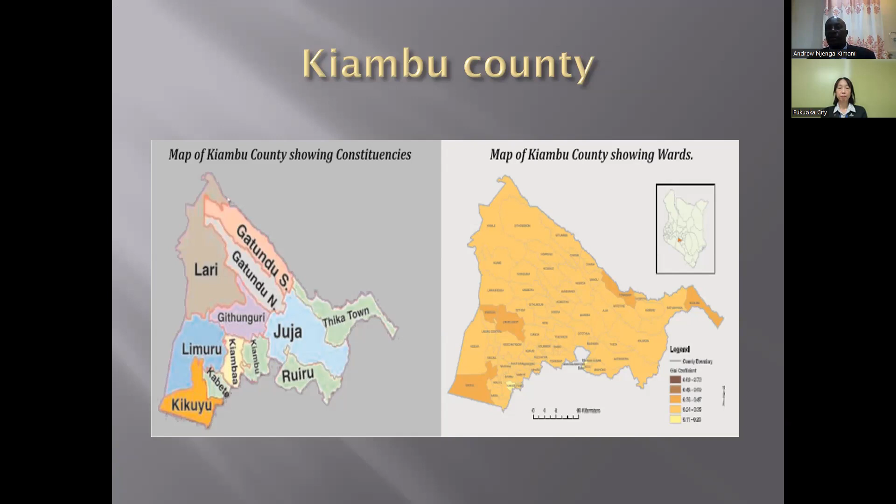So Kenya has a population of 50.9 million people according to the 2019 national census. We have 1 national government and 47 county governments. Kenya has rich tourist attractions. You can travel to national parks. The 7th wonder is in Kenya. And we have diverse ethnic communities, 44 existing together. Kiswahili and English are the national and official languages.

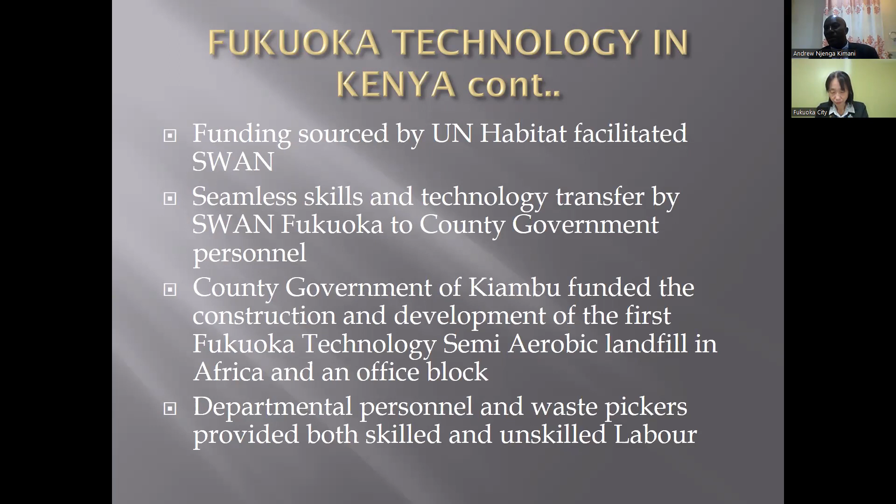So the first semi-aerobic landfill based on Fukuoka technology was completed in a record one year in 2016. With the synergies brought by this, Kiambu became a local and regional benchmarking destination for other counties and African countries. Kiambu had the privilege of having a side event at the first TICAD in Africa.

That is TICAD 6. Plans for development of supportive infrastructure for the Fukuoka semi-aerobic landfill were in place using the $350,000 disbursed by the UN as part of the funding, for the weighbridge and a 50-ton daily material recovery facility. This is the money that remained after paying the consultants, which was supposed to put up supportive infrastructure so that the operation of this facility could proceed.

But this did not happen as planned, as it was an election year with a change of government. We had a new election in 2017, placing a new administration that was a departure from the first administration, and that did very little to support this important technology to take off.

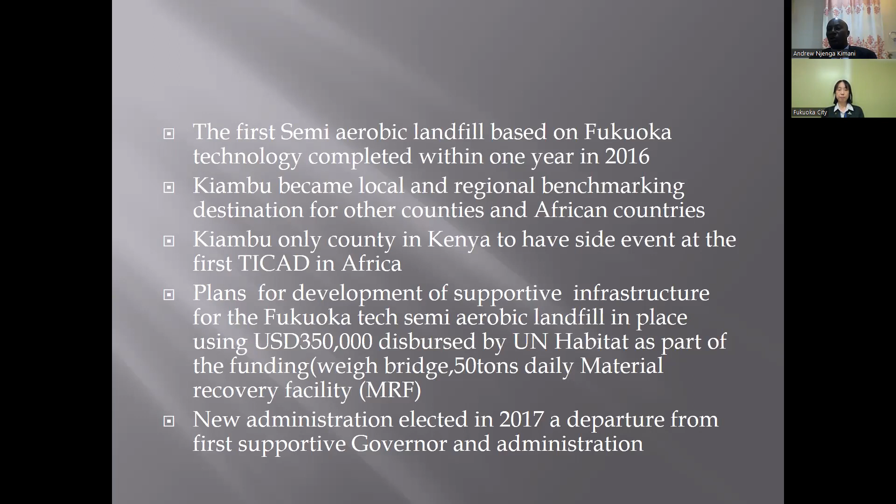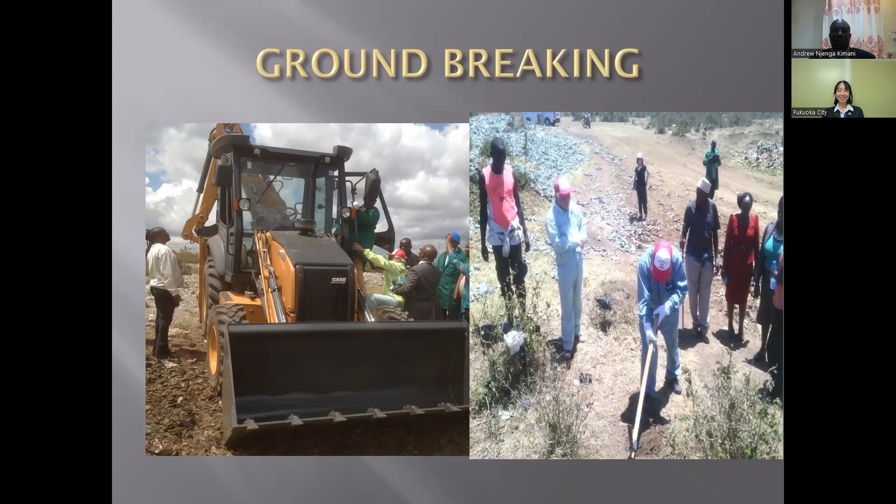So the groundbreaking, we have the governor, we have Professor Matsufuji from Solid Waste Advisory Network, advisors, and then African Region UN Habitat Director present, and other Kiambu County and Kenya national officials. So we can see Professor Matsufuji literally breaking the ground. Next slide. Yeah, so these pictures show the groundbreaking day, which was a great event for having brought this appropriate and good technology to Africa. Next.

And after the groundbreaking, the construction took on, and the Kiambu County officers in the Department of Environment and the waste pickers at the dump site were engaged in the construction. So this was hands-on transfer of technology. It has never happened again in this country. This was the first engineered landfill, and even the next one that is being funded by the World Bank, the tender was floated, and a company given the rights to construct, which is a big gap because the officers in that county, which is next here called Murang'a, have no idea what it is.

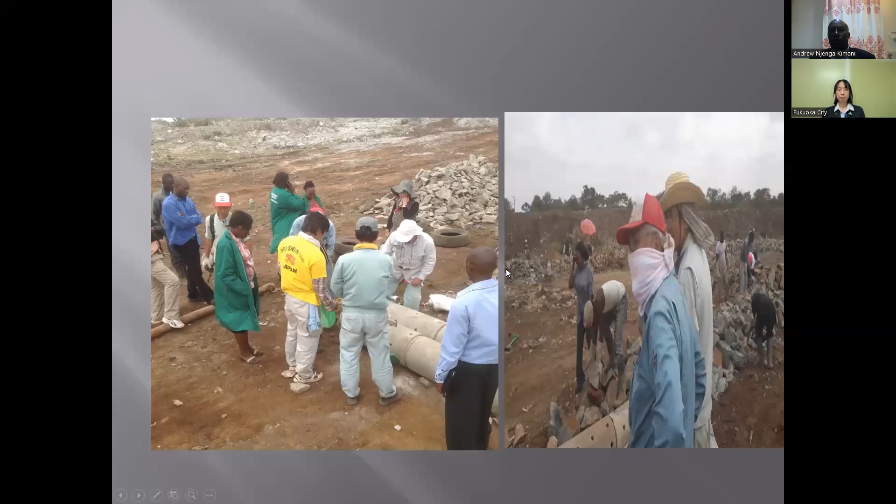So Kiambu has the first officers to have hands-on training in engineered landfill construction and management, which is a great idea and approach by the Fukuoka group. So yeah, next.

So these are the leachate collection pipes, which were sourced locally. We opted for the concrete pipes, which were perforated 2/3. It was a challenge initially, but eventually locally we are able to do the perforations. And you can see the cobblestones as referred to in Japan. In Africa, we refer to them as hardcore, locally sourced, which are covered 50 centimeters to allow ventilation and also seepage of leachate. Next, please.

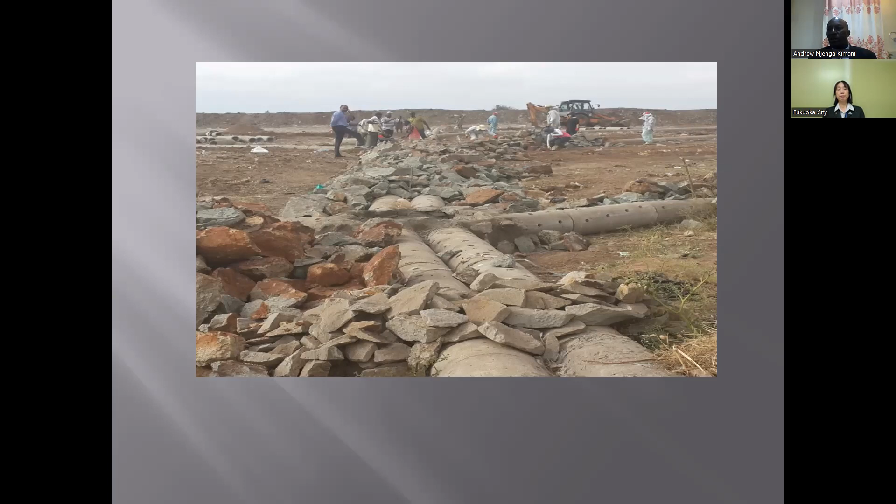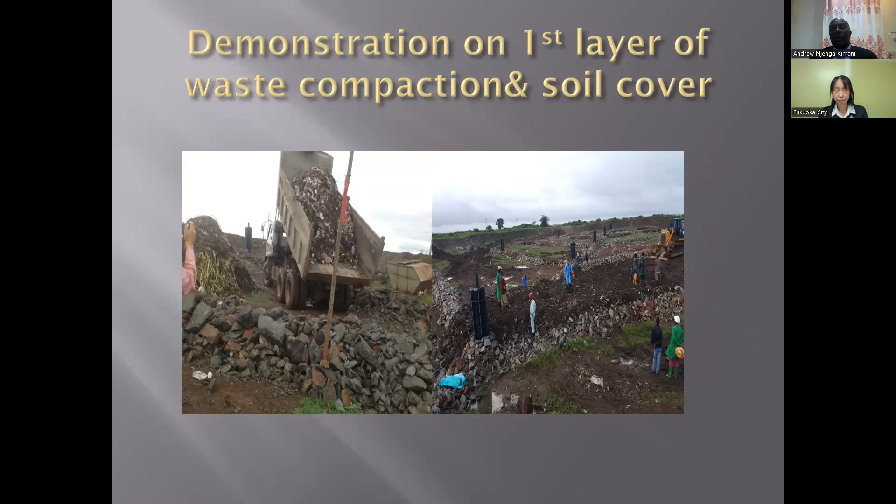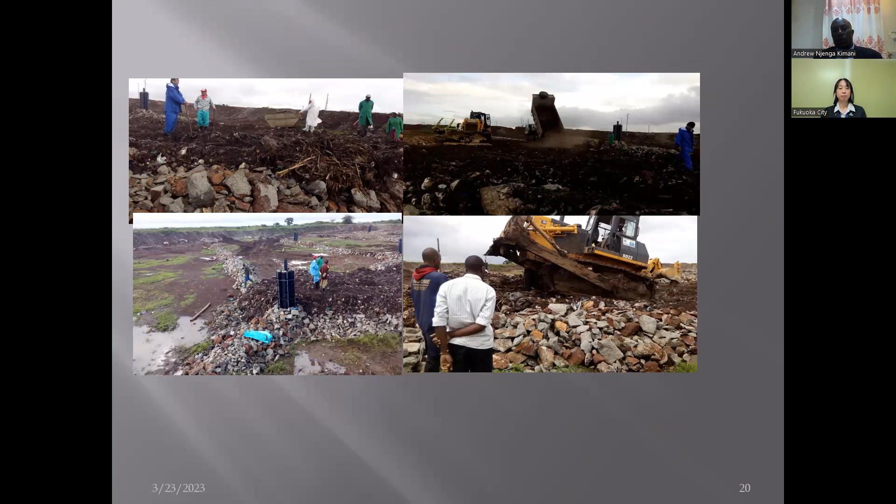So in 1 year, we were able to do the landfill. You will see from the background, and even demonstrate on the tipping and compaction and cover of soil. And we did this with around 50 trucks. And we were able also to see that the leachate started forming, and we were able to monitor the progress. Next. So these are the demonstrations. You can see the vertical vents and where the waste has been put. Compaction, we were using the bulldozer. That's what we had that time only. So next.

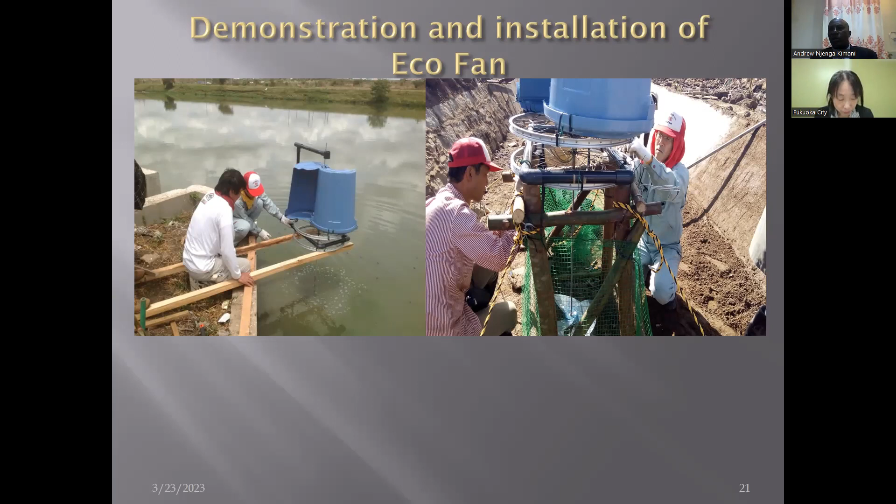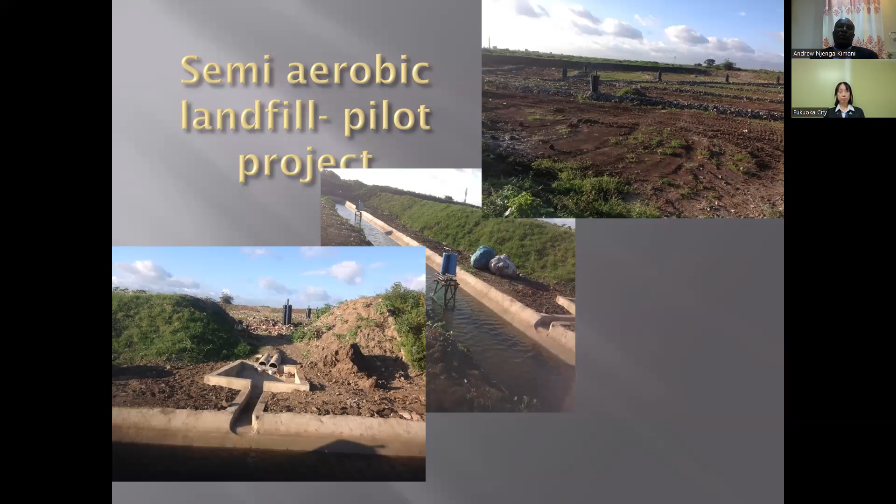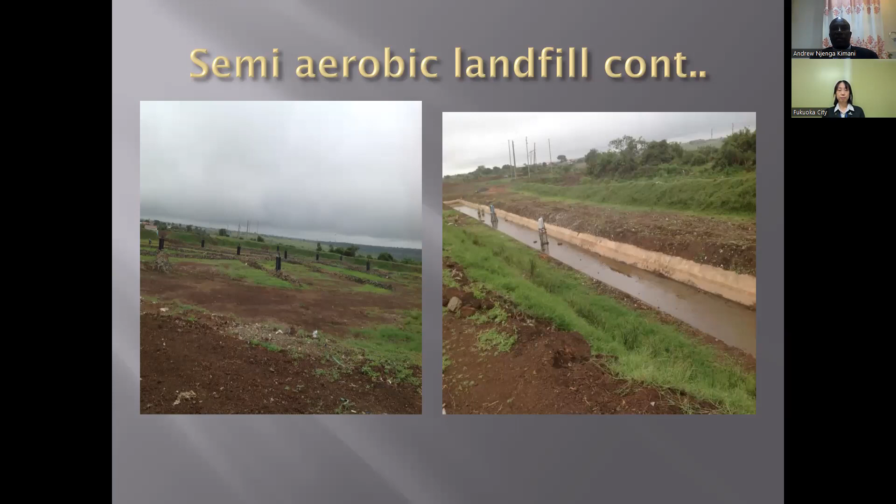So within 1 year, we were able to have the leachate, and you can see the landfill and the leachate that came from the demonstrated compaction and the waste that was compacted in the landfill. So that is between 2015 to 2017. So the next slide. Yeah, see, so this is basically the landfill. We had around 21 cells and all vertically ventilated. And this is the leachate control point with the eco fan and the biotope, also for the treatment of the leachate. Yeah, next.

The Fukuoka method also came with composting. As you noted, the larger fraction of our waste, 60%, is organic, and it is also a resource. So we had a composting facility also using the Fukuoka method.

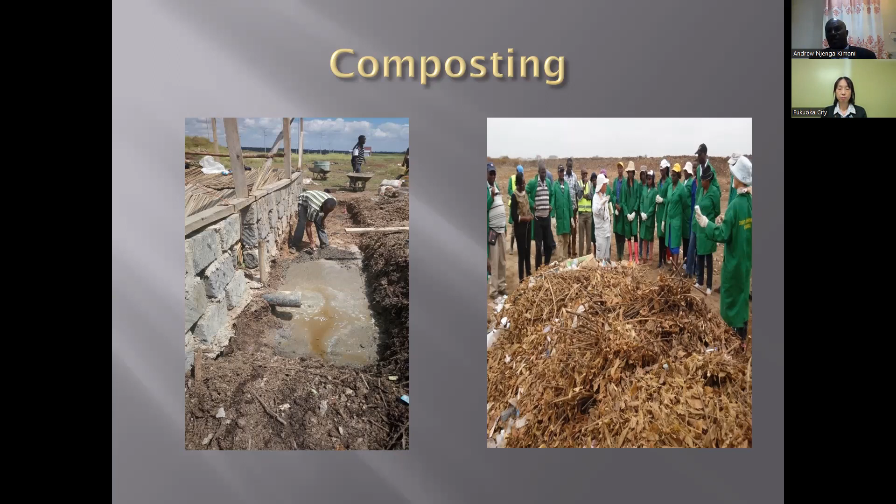And the photographs there show the training of the local officers and also the local political members of the ward, we call them here members of the county assembly, who participated in that. So there was a lot of support, political support, administrative support. And we were able to have the first composting facility at the dump site functional. Next.

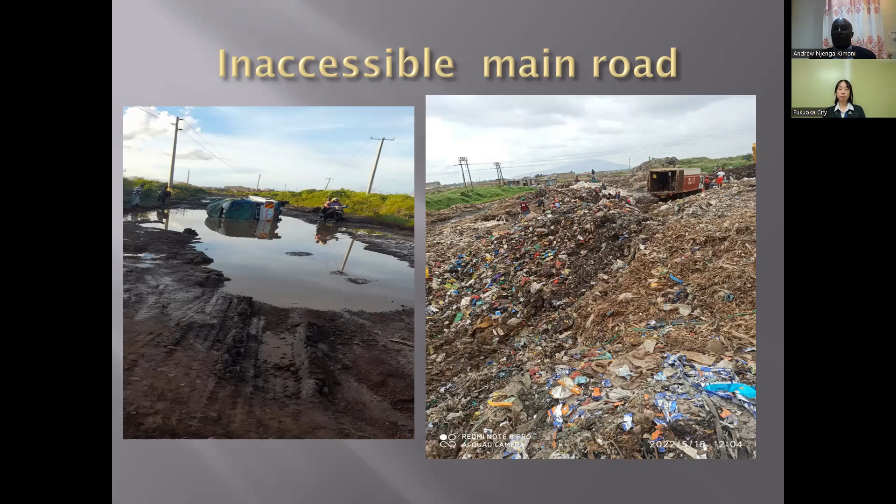And for the record, the picture on the right, this waste was dumped in the middle of the road for 5 years, the same road we had done. So you can see mismanagement, lack of skills and commitment. Next phase.

The Japanese government had to come in again and assist in provision of heavy equipment, because the first bulldozer that we bought was mismanaged. And even to date, we are trying to repair it. So the whole road was covered with waste, as you can see in this picture. And it's now trying to trace the road again, put back the road, because this is now happening after the new administration that has come in 2022.

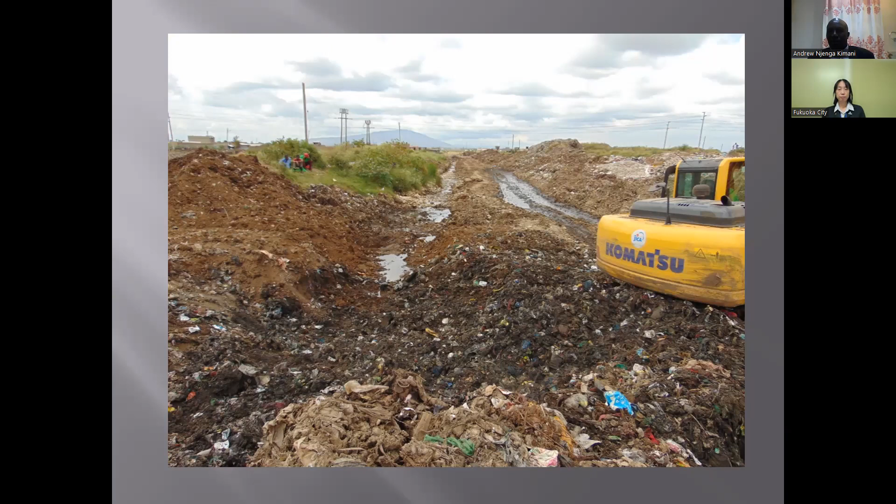Otherwise, between 2017 and 2022 election, this was the state, nobody cared. And this waste was dumped all the way to the people's estates, and what followed were riots and demonstrations. So next.

Nobody really cared. So the government of that day had zero priority on waste management, and the officers who are heading them, because when the new administration came in, I was removed from office politically, so that they would bring their cronies or preferred people, and these were the results. So next.

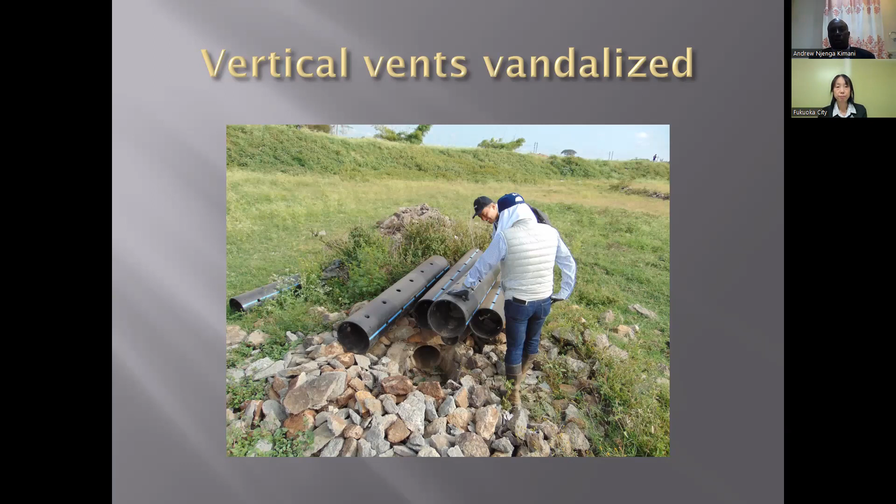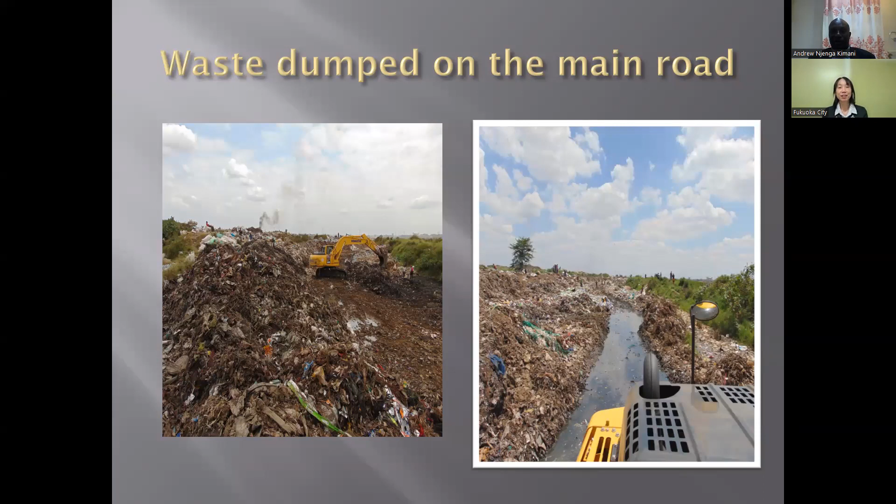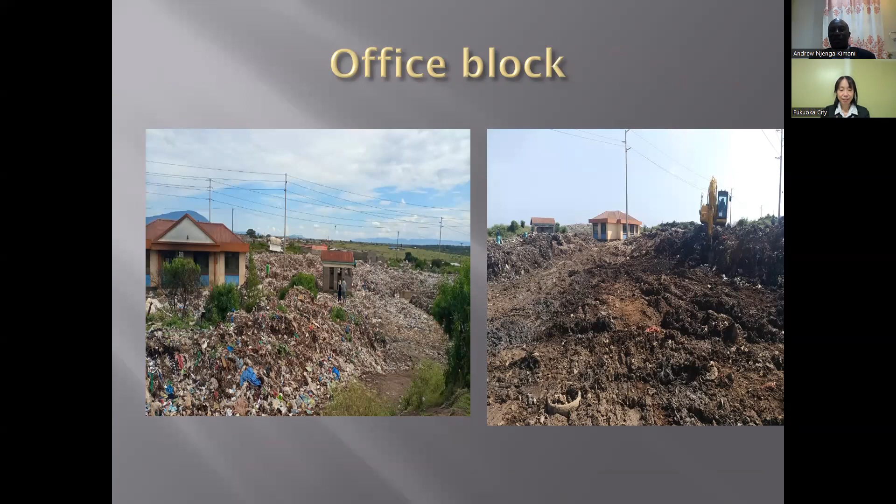The same office that you saw, very well established. Waste again was dumped and covered the office. And the same office was vandalized. So these are the scenarios that happened in 5 years. Total mess. Next.

So the office is again completely vandalized. The steel doors, the windows gone, the washrooms and the guardhouse. So there was just devastation in 5 years. Next.

So the third phase of devolution will show again another level of commitment from a new administration. And actually, before we go back to that, is that office block, the idea of constructing it was to be a secretariat for the African Clean Cities Platform, ACCP, a training center to other counties and other African countries.

The office had a boardroom, a laboratory for testing leachate and all that. So it was an office that was meant to improve waste management in Kiambu County, Kenya, and Africa at large. So that was how important that office was. Next.

So last year, 2022, a new governor came in, and you saw the efforts that started. And I was also recalled back to the office. The governor is also committed and supporting the project. He's aware of climate change issues, the importance of waste management, and the access road.

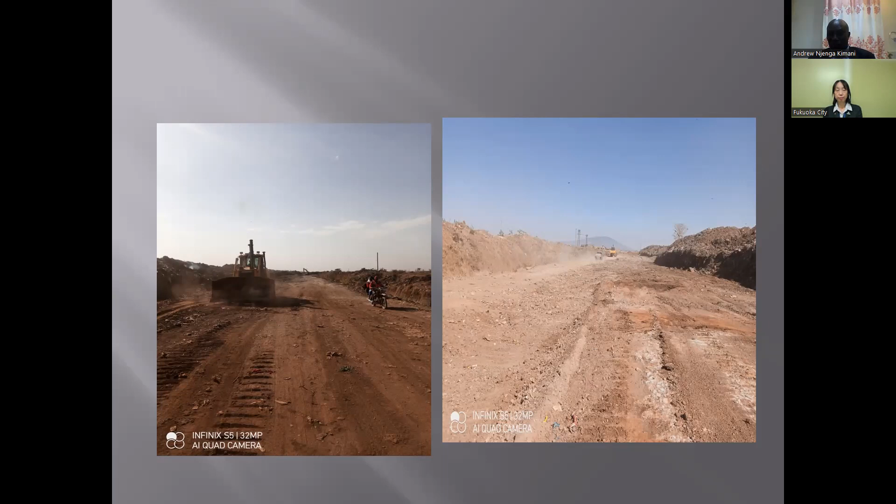And you can see we were able to open it in the last 3 months from December using the heavy equipment donated by Japan. So this is now how it is taking shape currently. Yeah, next phase.

We had a lot of support, so we also constructed a stormwater drain and stabilization of the surface, which is ongoing even right now using the cobblestones, popularly known in Kenya as hardcore. So this is what is ongoing because without an access road, it was difficult for waste to be disposed in the right place, even accessing the landfill.

So waste was being dumped within the residential areas at night. Illegal dumping was very prominent. Next.

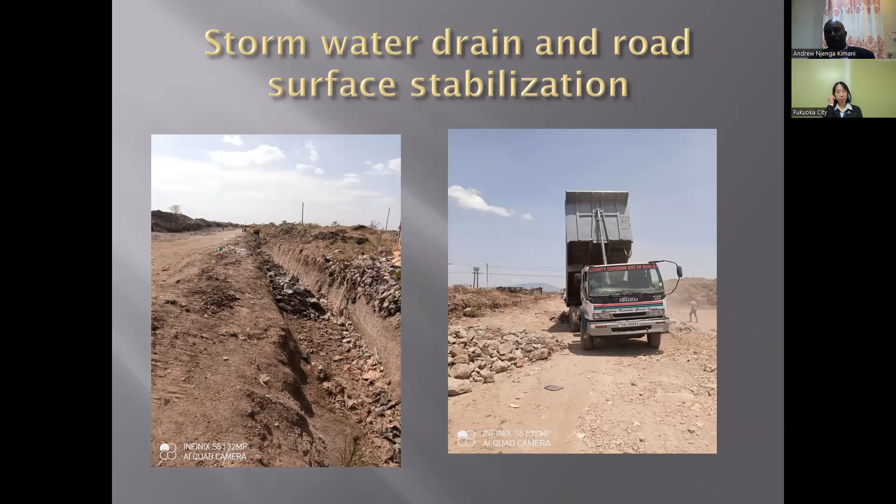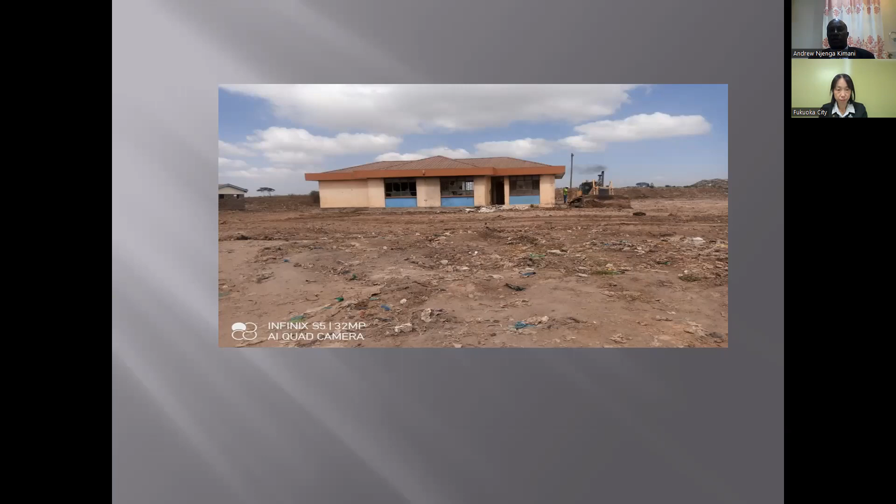So this is again the office we have cleared. The current governor is committed to repairing it. We've removed all the waste and we are waiting. We are already in the procurement process of repairing this important office. Next.

So the benefit is that the Fukuoka technology is recognized by the United Nations Framework Convention on Climate Change as a mitigation technology. And this is actually why it is quite an acceptable technology, because basically the production of methane is quite limited and managing carbon dioxide is easy because we only need to plant trees, which we have planted, to act as a carbon sink so that climate change is not affected, because dump sites contribute to global warming. So locally available materials are easily used effectively.

Again, the beauty about the Fukuoka team is that they effectively transfer skills hands-on. And right now in Kiambu, we have officers who are hands-on in the construction, the maintenance and the management of the landfill and the Fukuoka technology.

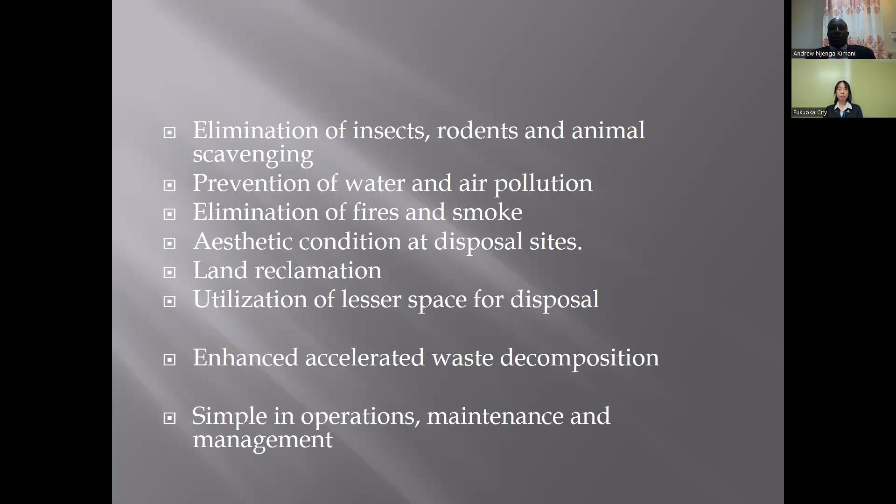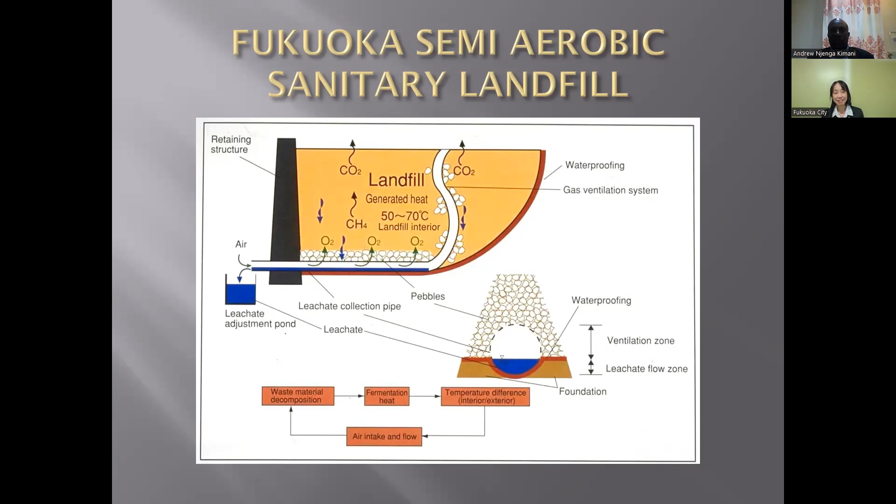Now, the opportunities in Kenya: we have a new law, the Sustainable Waste Management Act. It emphasizes a circular economy. But again, as a country, we have very many dump sites, and one of the biggest in Africa is in Nairobi, the Dandora dump site. So the Sustainable Waste Management Act stipulates clearly that the country needs to shift from open dumping to landfilling. And this is quite an opportunity for us to continue. Our economy is generally linear with limited waste reduction. Waste recovery by waste pickers is less than 10%, meaning that almost 90% has to be disposed of in the landfill.

A recent achievement in Kenya is the plastic ban, because plastic is a menace. Single-use plastics were banned. Then again, we have a well-established legal and regulatory framework at the national level, and an emerging system at the counties. So the laws are also available for that. Next.

Another very important component when the Fukuoka technology was introduced in Kiambu was the waste pickers. The Kangoki dump site has over 600 waste pickers eking a living from within. And the waste pickers were the first line of communities that we had to engage and work with so that they support the technology. So we had regular meetings from 2013 up to 2017, when it stopped. Last year, 2022, we started the meetings again. And you can see the registration ongoing so that they own the project and also guard against vandalism. So we have been having weekly trainings.

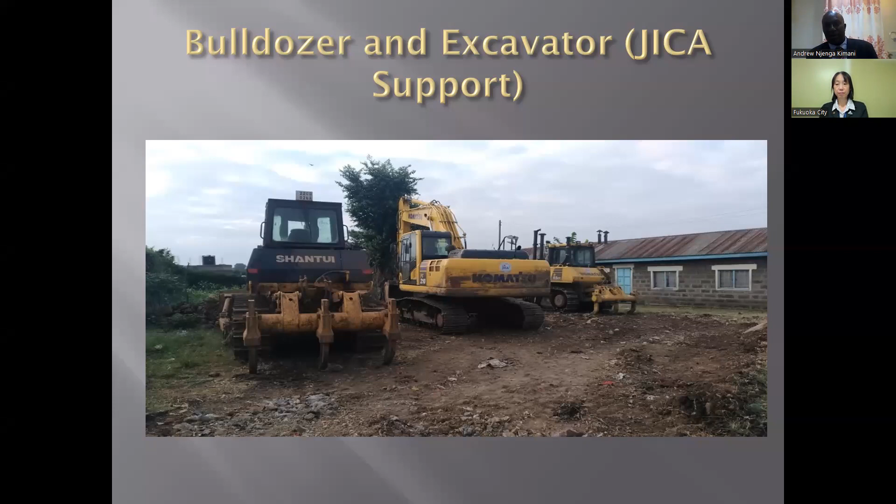These are the donated equipments. The left one is the one we bought in 2016, the Shantui. Then we have the Komatsu that was donated last year by the Japanese government through JICA. And this has helped a lot in undoing the mess that was done in 5 years. Next. So this is the handing over of the machines last year. Next.

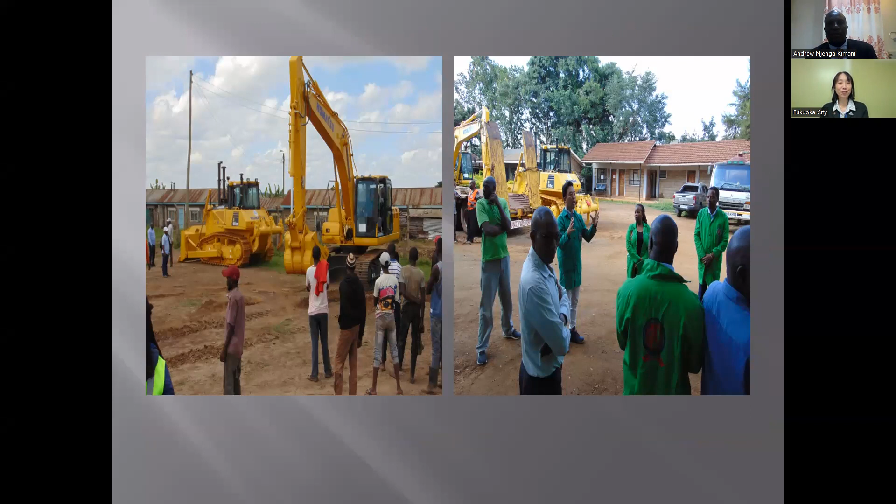So thank you so much for the time. So we can see political goodwill, good leadership, and resources are quite integral in the success of the Fukuoka technology. Thank you so much. Arigatou gozaimasu.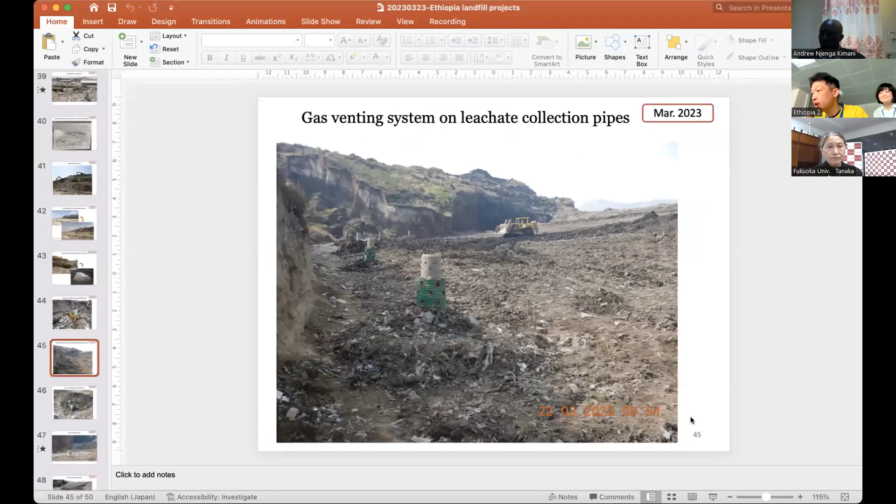So with that said, Fukuoka method has flexibilities. You can do a lot of things with different levels. For example, as Hoshino-san mentioned, we have the Hawassa project in Ethiopia. Can you see my screen? You see a gas vent that's being installed. Because it was difficult to arrange heavy machinery, a lot of things were done manually. So local workers, waste pickers, we got very close to waste pickers, and then you can do something like this.

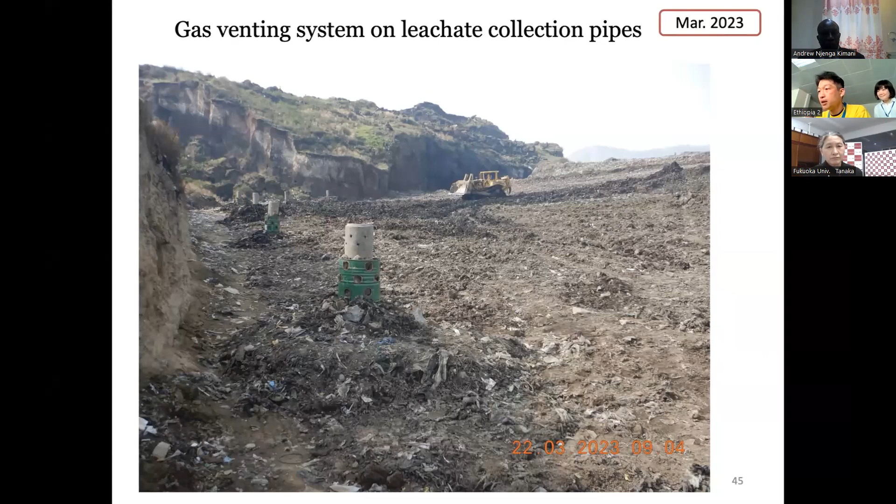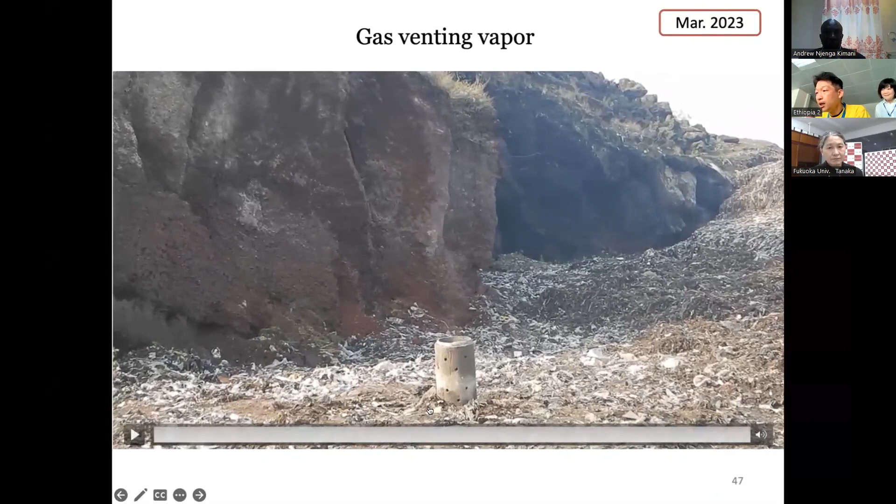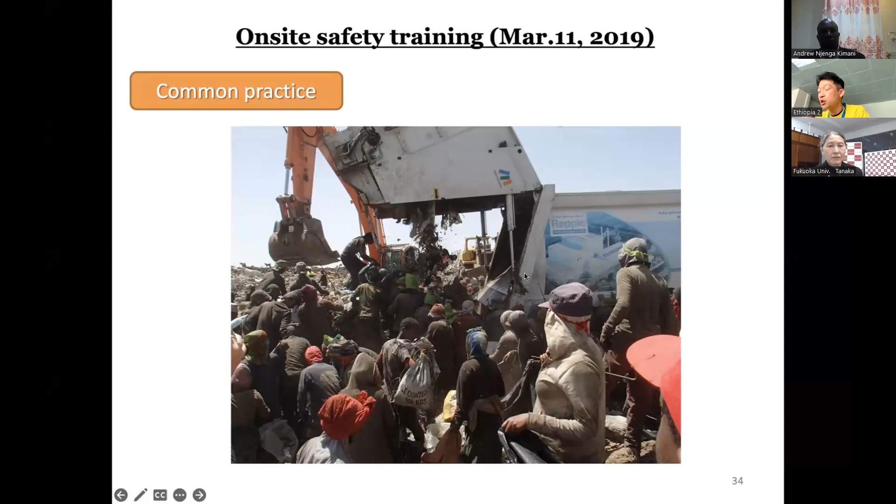And here is the video. A day after we installed the gas vent, you see steam. Well, the decomposition has been really facilitated with the gas vent. So again, this is something that was done mostly manually. And I think this is a big issue in many countries. Waste pickers and waste collectors are competing with each other. They are fighting each other to collect precious metals and others. So you see a lot of people, and some people actually died because of the crash.

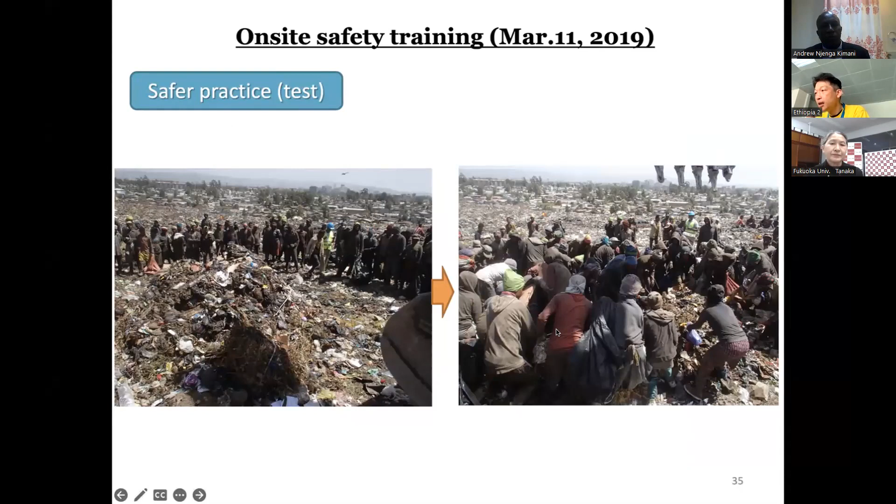And this is Addis Ababa's project. So waste was dumped, and then an excavator was used to spread the garbage, and then waste pickers started to pick recyclable waste. So in the past, it used to take 4.5 minutes, but after spreading the waste, it takes only 1 minute because you can see what's available there, and you don't have to worry about colliding with a bulldozer or waste collection machine. You can reduce the number of accidents, and you don't need muscle. It's more fair. I mean, women and everyone can participate with Fukuoka method.

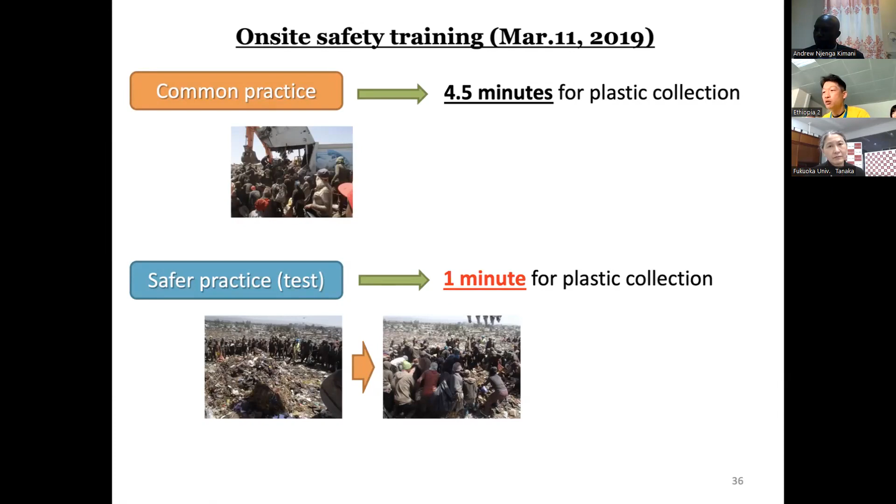So there are different kinds of steps. Even if you don't have heavy machinery, you don't have resources, you are still able to introduce Fukuoka method. If you have a passion, you can think what you can do on site with limited resources, and you can take action. So as long as you have passion, I will encourage you to consider introducing Fukuoka method.

And one more important thing, when we discuss waste issues, a lot of municipalities are trying to prioritize sorting garbage and recycling. But even if you don't have a recycling system or sorting garbage system in place, Fukuoka method is applicable. Of course, recycling is a good thing to promote, but you don't have to wait to introduce Fukuoka method. You can introduce Fukuoka method, and in parallel, you can introduce a recycling system to reduce the garbage. I think that's ideal. You can do both in parallel.

You know, people often talk about 3 R's. 3 R's are important, but at the same time, you can introduce Fukuoka method and then treat gases and treat water. There are a lot of people who are suffering. So with Fukuoka method, I think you can do a lot of things. That's all.